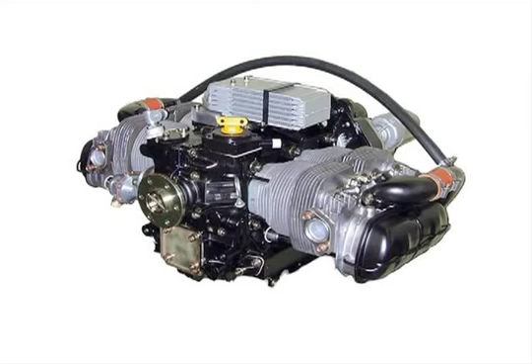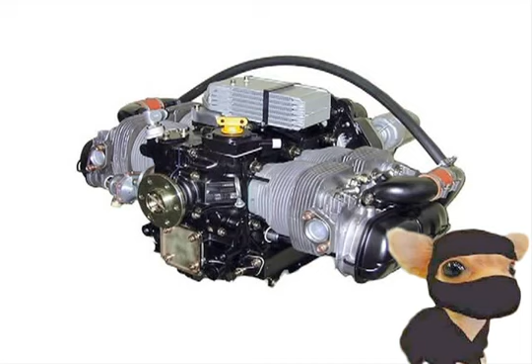This episode will be joining the party that has piston engines. Tally-ho, then, what? First of all, this is a piston engine. As subtly hinted at by the name, a piston engine is made up of pistons. You can't see them in this picture though, as they are doing their ninja impression, and are skulking in the shadowy depths of these cylinders.

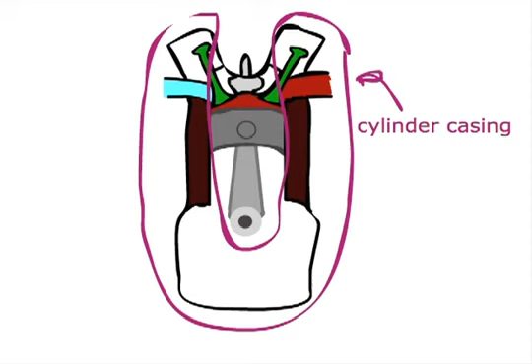Looking at just one of these cylinders, here is a cross-section looking inside. There is the cheeky little piston. This is the cylinder casing that houses all the combustible festivities. This is the inlet valve, which opens to allow a fuel-air mixture to enter the cylinder. The piston moves downwards, which sucks the mix through the valve into the cylinder. The inlet valve then closes, trapping the fuel-air mix inside.

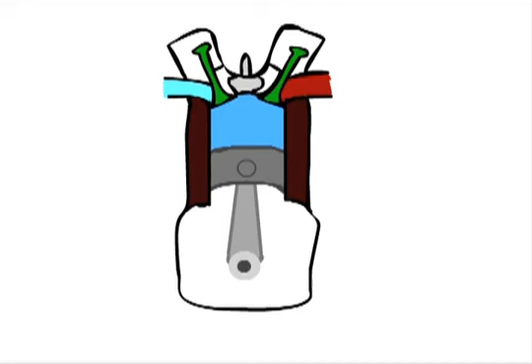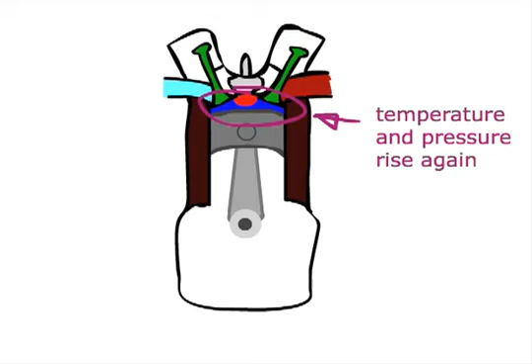The piston moves upwards again, reducing the volume and increasing the pressure and temperature of the fuel-air mixture. This is the spark plug, and at this point, it sparks, igniting the mixture. This combusting fuel quickly raises the temperature and pressure inside the cylinder, forcing the piston back downwards again. This is where the engine gets its power from.

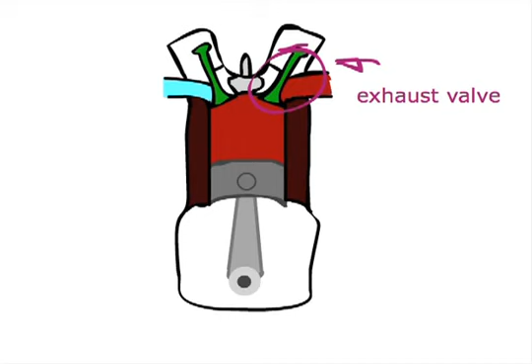This is the exhaust valve. It opens, and the piston moves upwards again, pumping the used fuel-air mixture out of the cylinder following its brief moment of glory. This is the Otto cycle, and can be summarised as induction, compression, power, exhaust. Or, in another way, suck, squeeze, bang, blow.

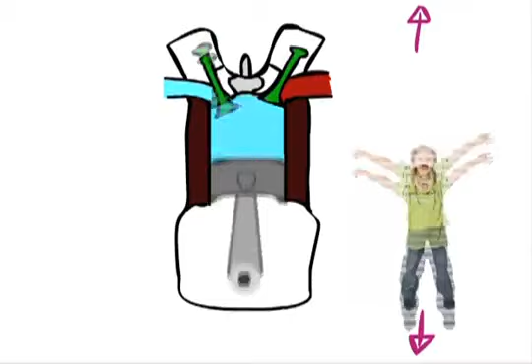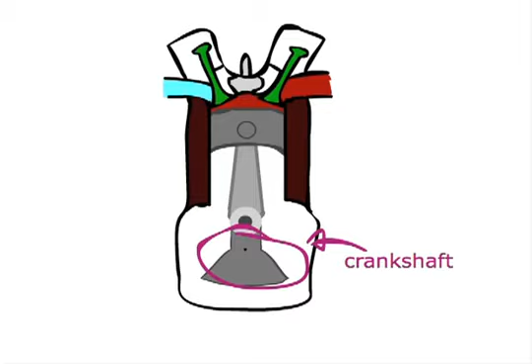So we've got a piston. But how does this up and down movement help us twirl a big metal thing at the front of our aeroplane? And how does the piston move up and down when it's not on its power stroke? Well, hold your horses, I'm about to tell you. The answer is in the foreboding duo that is the connecting rod and the crankshaft. They transfer the up and down motion of the piston into the more useful circular motion of the propeller, as you can see here. To understand the crankshaft, we need to look at a side view of the engine.

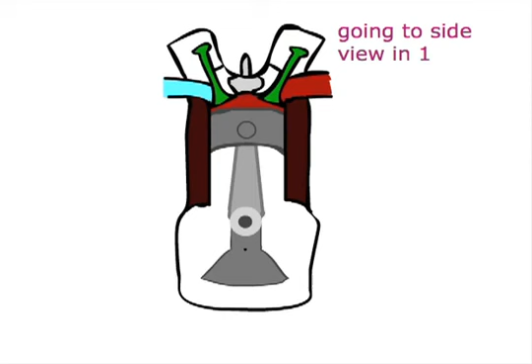Here, we have 4 cylinders, viewed side on. Here are the connecting rods, and here is the crankshaft. In this example, we'll pretend that the propeller is bolted on at this end of the crankshaft. The cylinders are numbered from the propeller backwards, and they are set up so that one cylinder is always on its power stroke, signified by this yellow block.

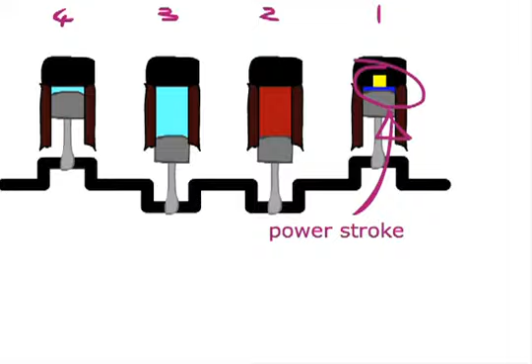They are also set up so that the firing order is spread across the crankshaft. First cylinder 1 will fire, then 3, then 4, then 2. This is to ensure that there is not too much pressure put on the crankshaft at any one time, and avoids excessive vibration and expensive noises.

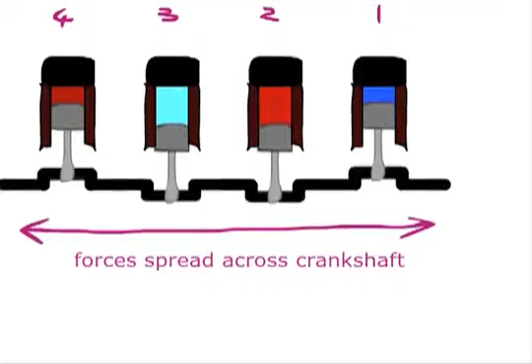Combustion engines are not very efficient. In fact, the majority of the energy in the fuel goes to heating the exhaust air and the engine itself. This is very inefficient. In fact, only around 25% of the energy in the fuel goes to propelling the aircraft.

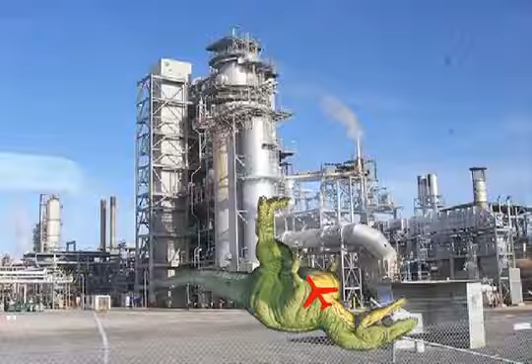I won't go into a rant about the fact that countless generations ago a dinosaur died, was buried by tons and tons of rock, waited around for millions of years for its appointment with a big tube that sucked it out of miles of ground into a pipeline, that regurgitated it in a big ship, that floated it thousands of miles across the globe, that dumped it in a refinery, that turned it into plane fuel, that was then slung into a lorry, that delivered it to your airport, that pumped it in your plane, and after all that only its leg was used to make your aeroplane go forward.

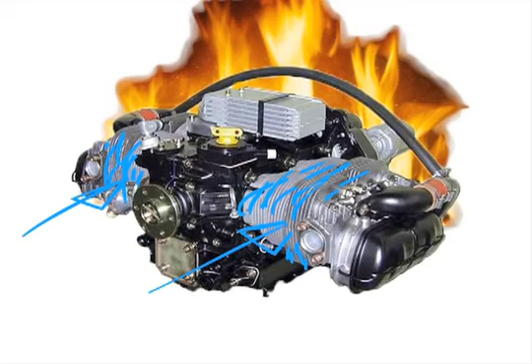Sigh. Because everything is so hot, we put all these little fins on the cylinders. This allows sweet, nourishing, cooling air to thoroughly cool the cylinders. If you have insufficient cooling, your cylinders can have hot spots. This can cause the fuel-air mix to ignite, as it enters the cylinder, before the spark plug has had any say in the matter, which is known as pre-ignition.

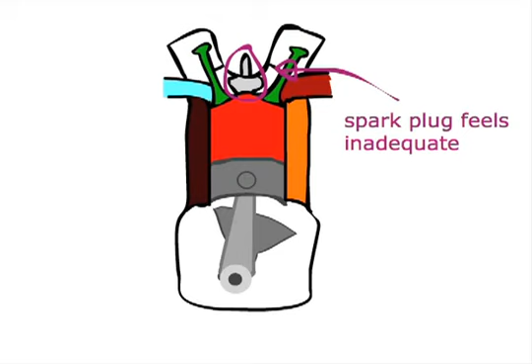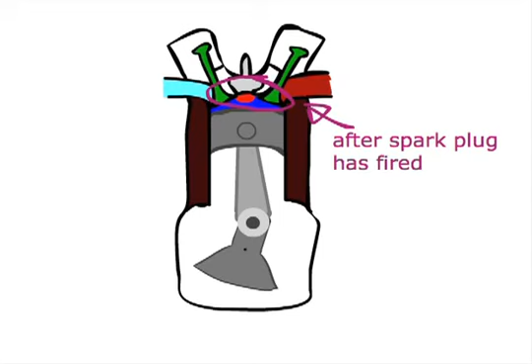The ominously named detonation is similar to this, but it occurs after the spark plug tries to ignite the mixture. Instead of only igniting from the top of the cylinder as it should, however, something else makes it combust from another point too. This can be anything from a tiny contaminant, hot spots, or if the mixture is compressed just a little bit too much.

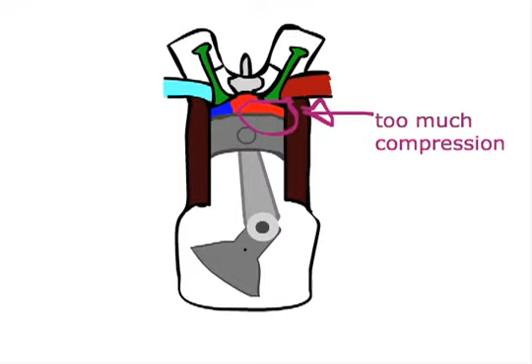You don't want either pre-ignition or detonation to happen, or else you may find yourself hosting an unwelcome and impromptu visit to the cockpit by bits of your engine. So keep a stressed eye on your temperature gauges in flight.

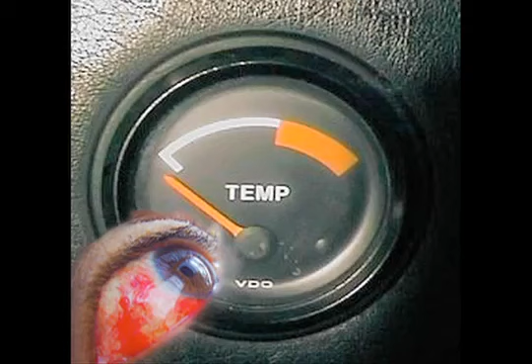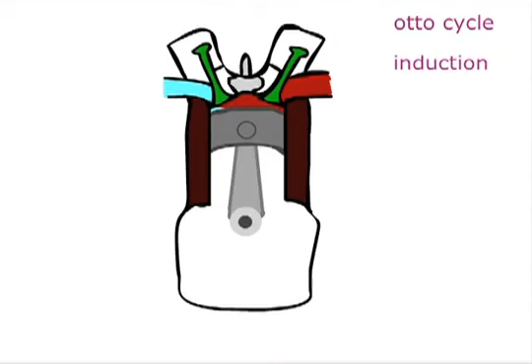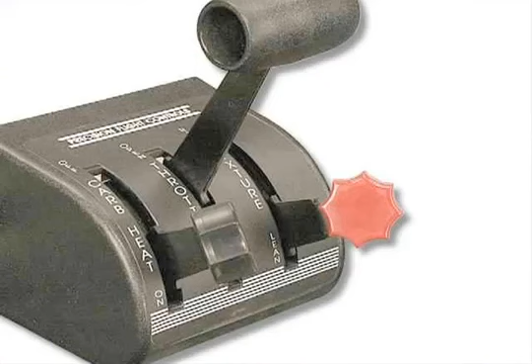Let's look at the fuel/air mix now. Oh joyful praises! The amount of fuel particles and air particles sucked into the cylinder during the induction phase of the Otto cycle can alter the way the engine performs. The ratio of fuel particles to air particles, by weight, is the mixture, and is controlled in the cockpit using the eponymous mixture lever, shown here by the praising lady again.

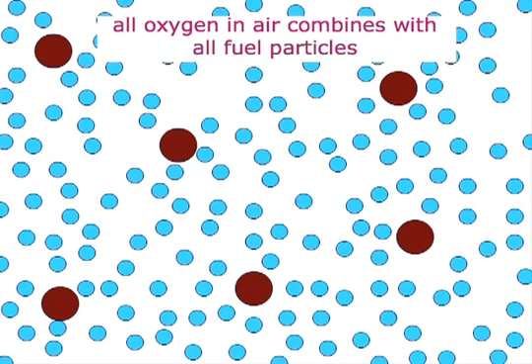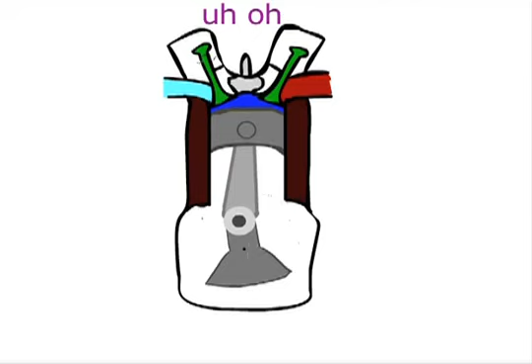She really loves aviation. The chemically correct level is 15 parts air to 1 part fuel by weight, as this ensures all the oxygen in the air combines with all the fuel particles. This releases all the energy in the fuel, with no waste. The chemically correct level is not used that often, as while it promotes no waste, it also burns the hottest, which promotes detonation, and therefore promotes no aeroplane. Which is not all that good.

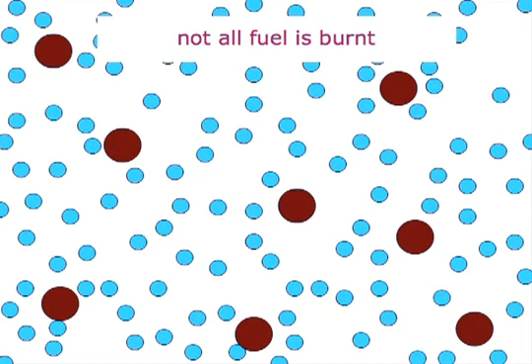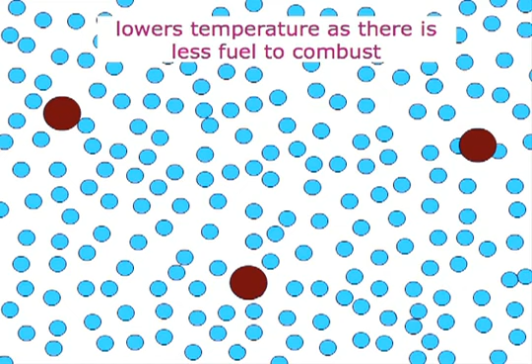Instead, using a slightly richer mixture, where there is a higher fuel-to-air ratio, means some fuel is not burnt, as there is not enough air to combine with it, and this has a cooling effect. Using a leaner mixture, where there is a lower fuel-to-air ratio, also lowers the temperature, as there is less fuel to release heat, but because of this, has the side effect of reducing the power released by the engine.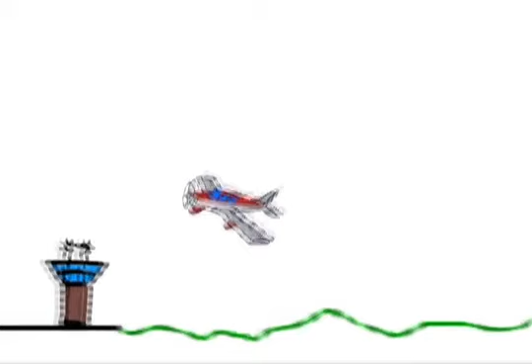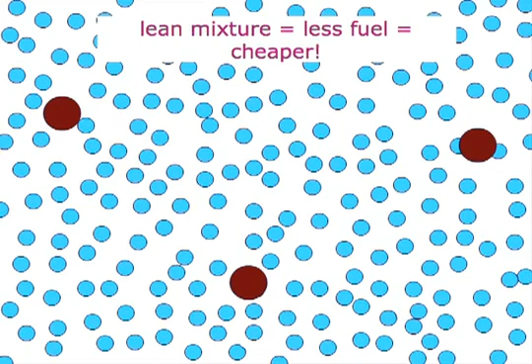For high power settings, such as at takeoff, climb out, or on the go around, we always use a rich mixture, as we need power, however we don't want to destroy the engine from detonation. That would ruin our day. There is more flexibility in the cruise, and depending on conditions, you can use a weaker mixture for better economy, and saving yourself from shrivelly wallet syndrome.

There's a lot more thrills to be had with piston engines, but I will leave you with that for now.